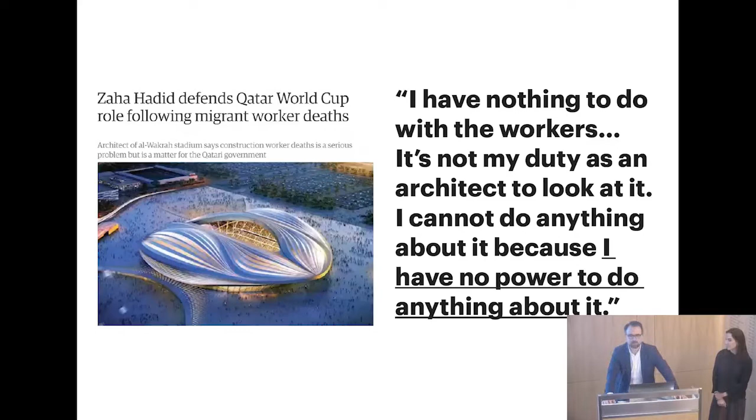This is in contrast to remarks that have come after, which have undergone a lot of fire, but not really pointing the finger at Zaha here—more at the idea that someone with her clout feels a lack of power in a situation. This speaks to the role of an architect or engineer, that they don't feel they can do anything about a construction site.

I think another one of our heroes is Giancarlo De Carlo. This is from 40 years ago, but looking again at contemporary architecture and my profession, we tended to think about what we were doing in a very narrow sense, and not broadly about its relationship to broader society. At this point, 40 years ago, it's pretty ironic that it's as salient now as it was then.

The risks of dependency and megalomania leading to social political indifference.

I gave a talk a couple months ago at the Museum of Architecture the day after this had come out. Again, I think it's interesting that one of the heroes, Sir Norman Foster and his firm, would lose a case about a project that ran well over budget. Ultimately the court decided it was their fault, but their defense was that it wasn't their responsibility—they were not in charge of cost and quantities, which I think would be a core responsibility of any design firm. That defense was ultimately lost, even though the client had taken away that power from them—they were still accountable for it.

Again, this is a guy with 'Sir' in front of his name that doesn't have the clout as a profession to have that within their scope of services.

And lastly, certainly not one of my heroes, would be the comment at the end of it, which suggests that our role as architects and engineers in the construction industry is such that social justice is not part of our competency—and we would certainly think that is the opposite of what we're supposed to be doing.

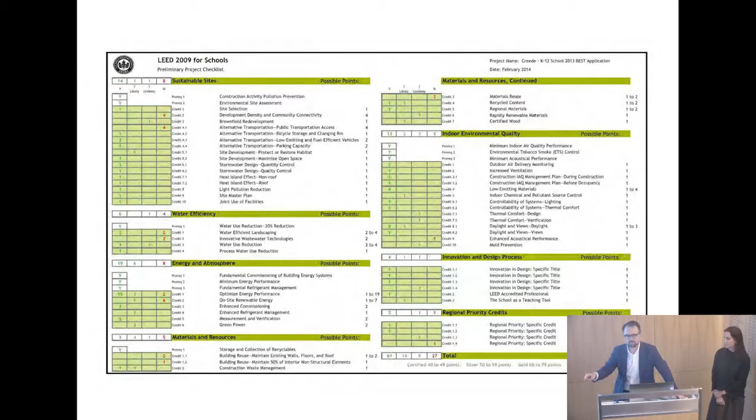We are green, right? What we at Mass were looking at was, okay, what are all the different ways—the kind of LEEDs of the world—what's out there right now for us to account for our work?

Because we are working with NGOs and health professionals in professions where funding is really based on data, they have to show results to get re-upped every year based on their annual contribution. So us as architects and engineers were like, well, we ought to be doing that too.

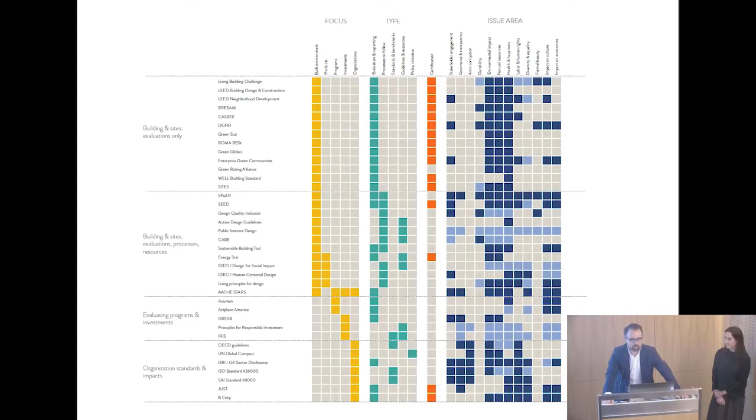What is out there? These are all the different kinds of LEED-type metrics that exist that we could find. And what we saw was that they're all very specialized. It's very much about environmental impact. You've got some things about health and happiness, and a few things about beauty, like formal beauty, but there are actually things out there about that.

There's zero on the mission side of a project, the bigger question of what you're doing and why you're doing it. And there's very little on the systemic side, i.e. how is this building or this project actually transforming the organization, the Institute of Structural Engineers, for instance? How did this building change the way that the organization operated?

So in thinking about this and the way that we have approached our projects, the first question we ask of our partners or ourselves is: what is the mission of this project? What are the broader ambitions of what we're doing here? And how at the end of the day do we measure them? How do we figure out that we're actually achieving what we set out to do?

And then as you drive directly across that, you're going to hit everything else. You're going to hit your environmental performance, or emotional satisfaction, which again is something not very measured. But these are things that are indirect, not the direct reasons why a group builds a building, right? A group is building a building for something larger, something more aspirational than just wanting a green building.

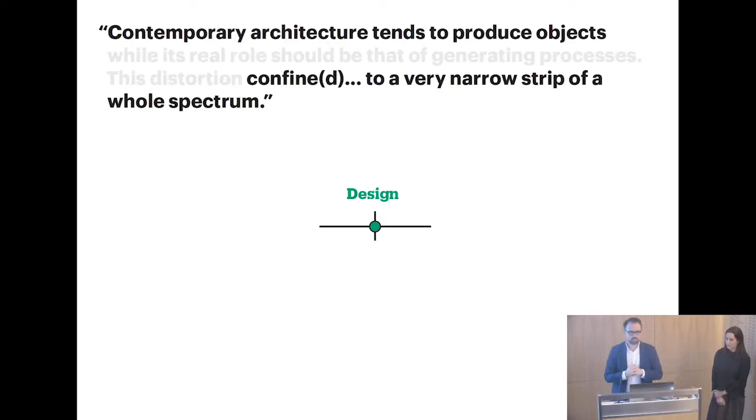So back to De Carlo's words, contemporary architecture tends to confine ourselves. We're designers, this is what we do, right? And we've left ourselves out of the whole process, from the front end of just getting in the room and working with an organization or an individual to help them envision what they want, even before planning and programming. And then ultimately we have some role in construction, but how much say we have in it is fairly limited at this point, and certainly very little is happening at the occupancy point.

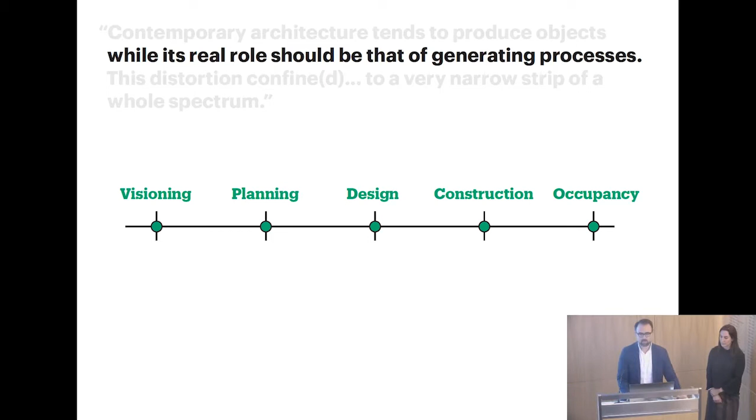So there's this wide spectrum of what we could be doing through the process of a project. And too often, I'd argue, certainly in my profession, we arrive late to the party. We're showing up at design when we've already missed the two fundamental parts that precede it. And it's going to set us back, and limit ultimately how effective we can be.

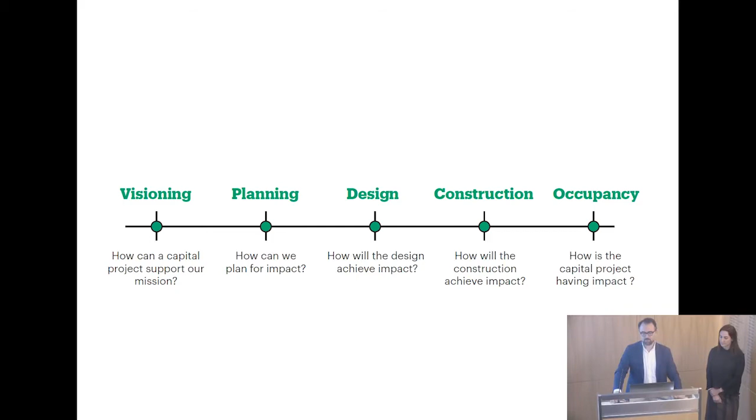So along these questions, what are the mission questions that we would ask the people we're working with? How can a capital project support your institution or your group? Is this what you actually need to do? Do you need a building, right? How can design achieve impact? How can construction achieve impact? We open these questions up to the people we're working with.

So that was kind of where we started as MASS. It doesn't stand for Massachusetts. It stands for a model of architecture serving society, if you're interested.

Our mission is very simple: that our direct mission is to research, build, and advocate for an architecture that promotes justice and dignity.

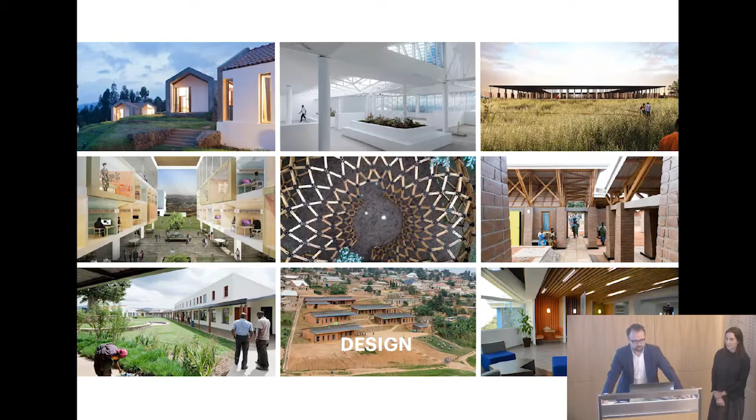We do a lot of design. This morning, I don't know if you've had a chance to see The Guardian, but pretty excited to say that the memorial in Montgomery, Alabama is opening today, and it's in The Guardian and on the front page of the New York Times today. We design things, but we also research a lot.

We want to think about that occupancy question, and also at the beginning, how can we work with organizations to think about those ends of the spectrum and help it feed back into what we're doing. So we do a lot of research, and as a nonprofit, a lot of the fundraising we do supports that work, which otherwise would not be funded within a typical design practice. And we also advocate a lot, and I think this is a pretty unique part about what we do.

Advocacy in this case was shooting a movie, which I'll show you shortly a trailer for, in Haiti about the cholera treatment center we did. Some of it could look very self-promotional, and certainly that helps when you're fundraising, but a lot of it is intended to work with the groups that we work with that ordinarily can't afford a building or can't afford design services, to bring the attention and the spotlight to them and their organizations and their fundraising.

In this case, you'll see GHESKIO, which is a Haitian organization that's been dealing with tuberculosis and HIV/AIDS. These are some of the groups we've been working with. Again, Equal Justice Initiative is the one today that we're celebrating in the United States. But certainly, the people we team up with are friends at ARUP, where we're currently hanging out these days, and a range of government and other NGOs that we've worked with on projects.

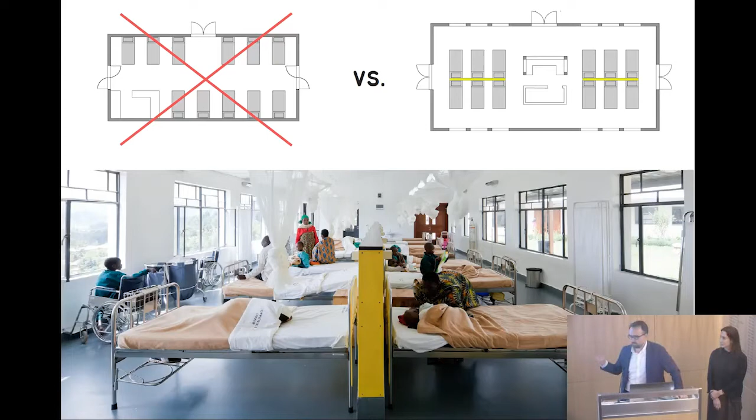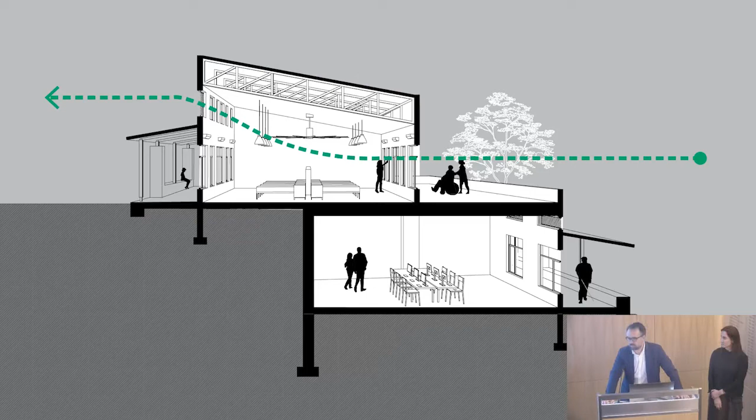And from an engineering and design perspective, all your gas and all your power is all in this wall. So you've halved all your MEP in the room and kind of put it in this narrow little wall instead of on both walls. So might be subtle, but a super important design decision that was arrived at through constraint and looking at everything, simple first principles across ventilation. Building does not have any air conditioning outside of the operating theater. So again, we have the advantage of the world's perfect climate, so you can just open your windows 24/7, 365 days a year to do this, but really starting to think through the basics of passive ventilation and first principles of design, I'd say.

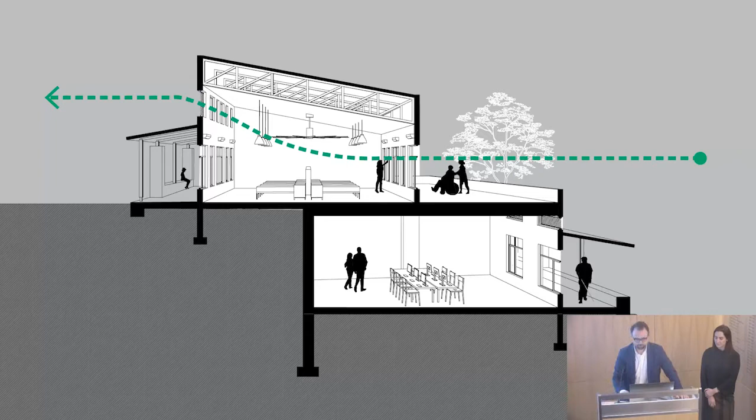This is what it looks like outside the wards. So instead, the wards are small, keeping our gross square meters down, but we have this landscape outside. So we, as much as possible, create outdoor space for people to get out into. The courtyard itself, its campus, is designed around this tree that the king used to hold court under. And that creates a beautiful landscape for people to walk out into. They're healing. This is a landscape that heals.

So a big part of what we were thinking about was that all the corridors are exterior. They're not interior, for disease control and infection control measures. Keep everything outside, get people out into the outdoors. And this is a kind of overview of it.

If you've not been to Rwanda, I always feel like I'm doing plugs for it, but this is your typical view, basically. The whole country looks this gorgeous, so come down.

On the back of this project, seemingly a success, their Partners in Health is great, fantastic. Alright, well, we need doctors here, right? So there were zero doctors there before. So our second project, on the back end of that, was to build housing for doctors at the hospital. It's about 2.5 hours outside Kigali, and the only way they're going to attract and retain talent to work there was if they live there, and they wanted somewhere that a doctor coming across from London or Boston or wherever else would feel comfortable—I'm going to live here for 6 months and train the doctor next to me. So we did doctors housing on the site, and again, very much in keeping with what could we build on site, and I'll get into that in a second.

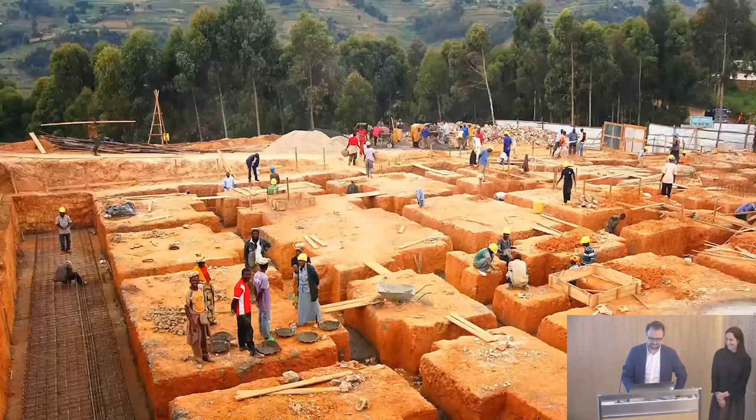And this is the first principle, and that happened over and over and over again. You got a set amount of money. You are in control of the biggest investment in infrastructure this community has ever seen. You've got the potential to make sure that as much of it is left in that place, and that people are gaining skills and jobs.

So that led to a series of decisions. What do we make this building out of? This is in the volcanic region of Rwanda, kind of like I've seen in Western Ireland, where stone is always coming up out of the soil, and they're piling it on the side—it's a waste, get out of my farm. So you see this everywhere, and some people make walls out of it. Sorry, this is the contrast: this is the wall you would see driving around, and cement is the expensive material. So they're celebrating, hey, look at my wealth, I can afford cement, right?

And we're on the other hand, well, if that's the expensive material, labor's the cheap component. It's the inverse of, I'd say, the construction industry certainly here. Labor is the cheap component, material is the expense. So maximize labor as much as possible, and you have this obscene ability to do mass customization. So that was a decision early on and became the icon of this project. Through this, the tenets that we learned and now use in all our projects: first thing is hire locally, second thing is source regionally. Some of this is just best practice or common sense perhaps, but in a lot of cases, you just don't have a choice.

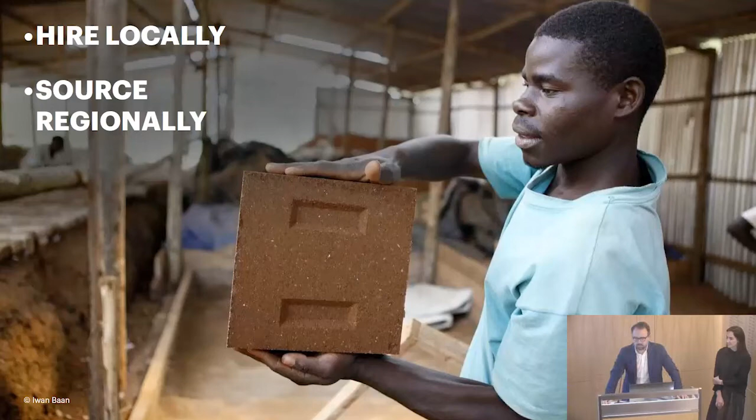You have to figure out how to get it locally. And we'll show you later on what we're currently doing.

Train wherever you can. We're working in areas where we're trying to create more employment and get people skills that they can take on to their next project in a part of the world that construction is obviously happening in. That's Teo, one of our fellows at that point, teaching. You can see a room full of children.

And uphold dignity. So much of it is about our human relationship to the projects and the communities that we're in. How do we make sure that is always at the center of the decision making of what we're doing? This is one of our schools that we built. So clearly, we've been doing all right with this.

We get some recognition, and it was an interesting point in time. We're getting on the front page of the Times here, and it's kind of a segue over to...

We were getting more and more work, and I think we were thinking to ourselves, okay, well, we can continue to work with engineers in California in a 10-hour time zone gap, and they're donating their services to us, or we can bring in our own engineering team and help build that part of our office to really support what we're doing.

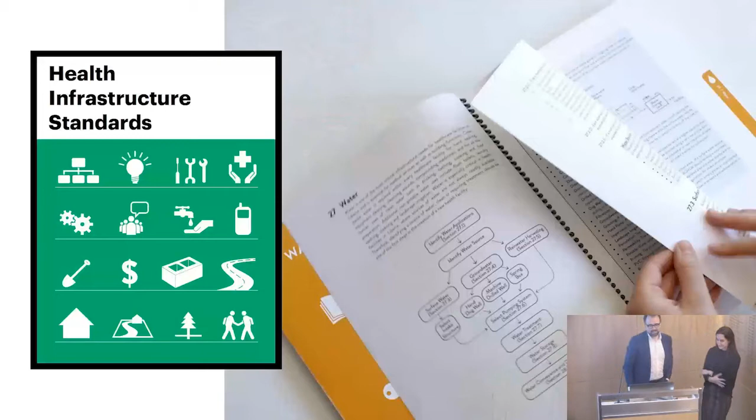And it was this project that Tim, ultimately the seed of MASS engineering, came on to help and started that. So I'll hand it to Rosie. Thanks.

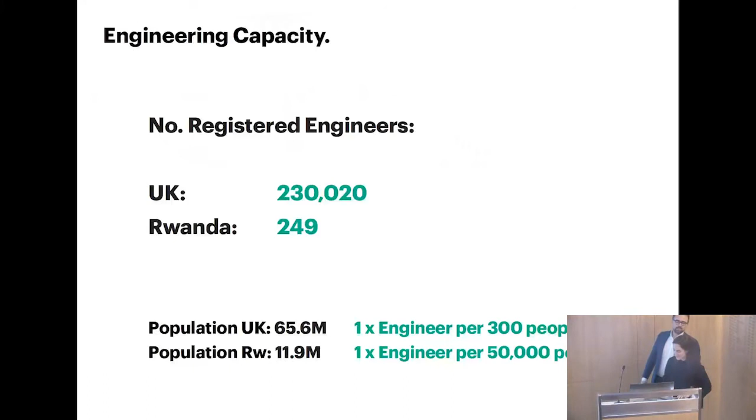As Faith said, I've been in Rwanda for 2 years now, and I lead the engineering team. It started out as a 12-month Engineers Without Borders placement, and this is why Engineers Without Borders work in this part of the world. We've got a huge capacity issue when it comes to engineers.

I did a little comparison earlier about the number of registered engineers in the UK versus Rwanda, and it's such a huge difference. We've got 1 in 300 here versus 1 in 50,000 there, and we have the same infrastructure needs. There's also the fact that institutions like the IStructE and the ICE have been around since 1818, and in Rwanda the Institute of Engineers only set up in 2008, so there hasn't been a regulating body there around for long either.

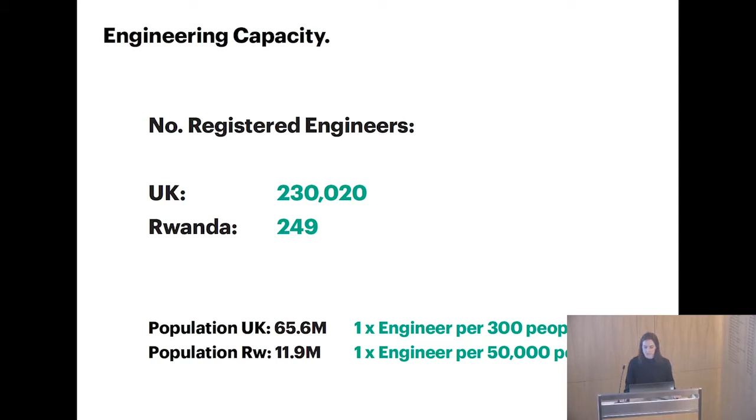So as Kelly mentioned, the engineering team started a few years ago with Tim and Christian. Tim was on sabbatical from Arup for a year. And when he left, he put MAS in touch with Engineers Without Borders, which led to Louise joining in 2015, and a very small team expansion with Obed there.

And then I joined in 2016, and we were able to hire Shakira. And now 2 years later, the team has tripled in size. Through our relationship with Engineers Without Borders, we've been able to expand to a multidisciplinary team and hire much more local staff. So we now have geotechnical engineers, civil engineers, mechanical engineers, electrical engineers, and we've also got 2 Arup secondees that are over for 6 months for a particular project, giving expert advice.

We also have our own partners, obviously Engineers Without Borders and Arup, but we also partner with other engineering firms. We do this because our team's not big enough to provide our own design review internally, so it's good practice for us to make sure that we get that technical review from another firm, and also to get particular advice on seismic design or certain innovative materials that we'd like to use.

So when I first joined MAS, my first project was a site supervision project, and that really gave me some clarity into construction in Rwanda. And so there's certain challenges that we face.

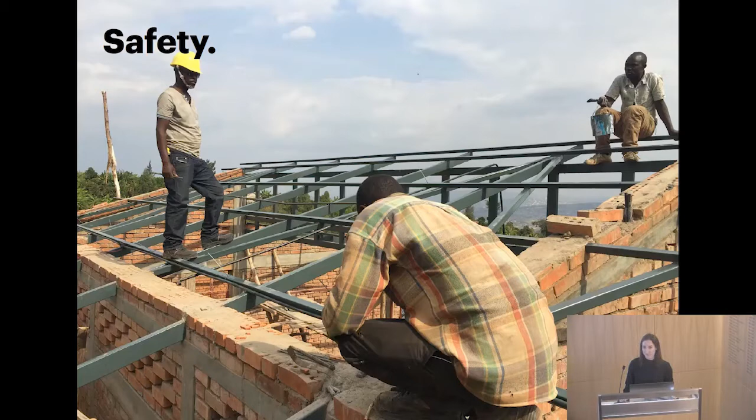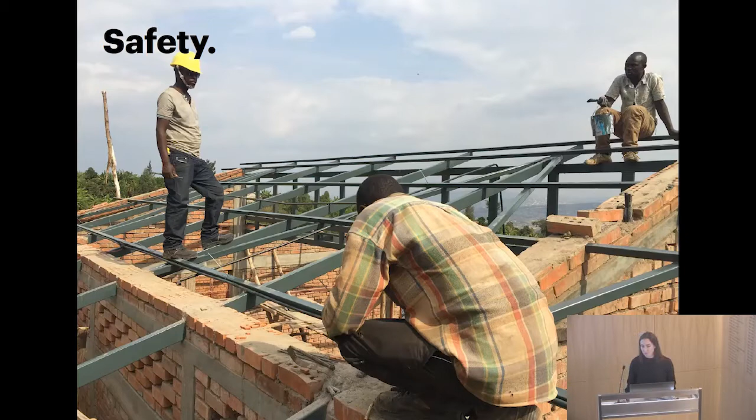As you'd expect, safety is one of them. There's a lack of data, lack of published data into accidents in the construction industry. I'm assured by doctors that they happen frequently, but I think because they're not well advertised, people don't necessarily understand the danger that they're in. And a lot of the labour is unskilled, and they don't have any basis to demand better working conditions. So we make sure that on our sites now, we have a member of our team, our health and safety officer, who does monthly visits to make sure that both our staff and the contractor staff are safe, and that we're getting the client to buy into our initiatives.

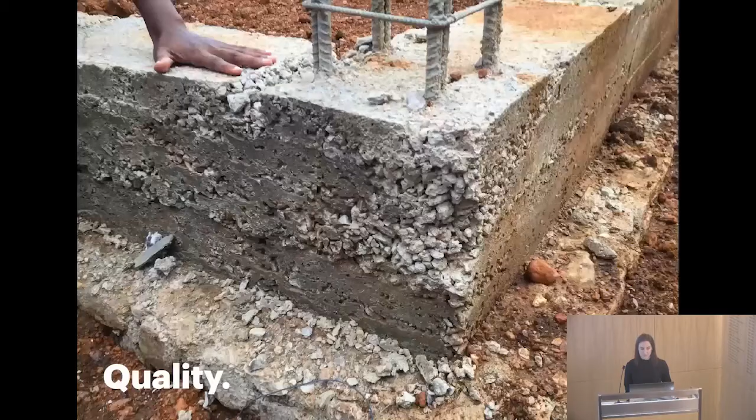Quality. Now, often, as I said, the labour's unskilled, and there's a lack of decent equipment. But we do absolutely believe that high quality construction is possible with the right amount of training and supervision. And it's often just about setting up the right relationships with the contractor early on so they know what you expect.

So we have to be extra vigilant on site and really understand everything that's going on, because this was a big concern for a few weeks until a retaining wall was built.

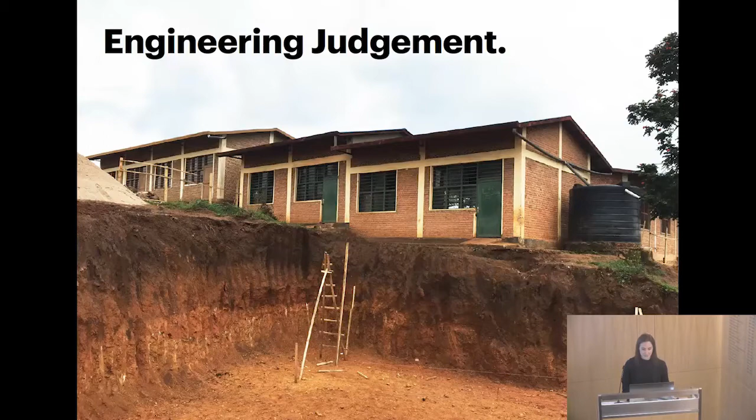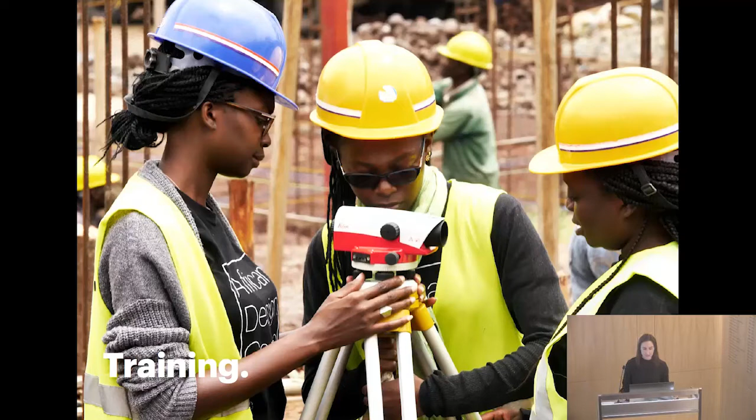So I think what we've come to understand is that construction requires supervision 100% of the time. And now we're entering a period of unprecedented construction at the company. We've got more construction happening this year than we have for the last 10 years. So we've got a lot of responsibility in terms of site supervision, and we've set up a training program to make sure all of our engineers have the right support and training to do that appropriately.

In terms of challenges in design in the country, it's a very hilly country, as you saw from Kelly's photos. So we've got lots of retaining walls, and lots of them fail. There's also a decent amount of building collapses, particularly recently - there's been a lot of storms, and we heard of about 5 building collapses just yesterday. So promoting structural integrity and good design is really important.

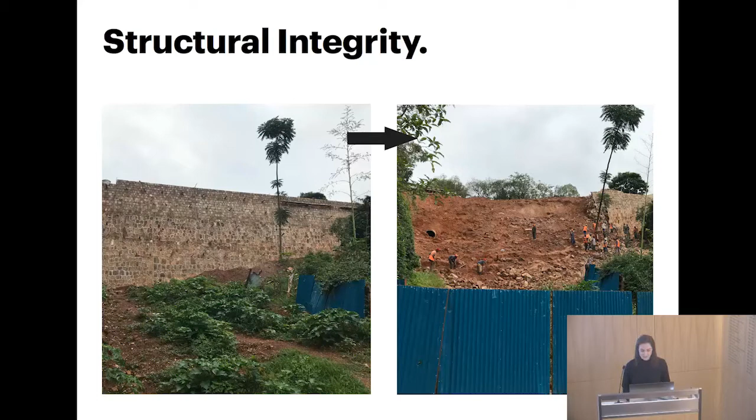And it's a seismic zone which isn't well understood. As our engineering team has been small and we haven't necessarily been around for the whole of MAS's history, we have used other local consultants, and at times our engineering team has had to get involved to explain why we don't think their design is appropriate. That's another reason why we've been expanding so much, to make sure we can cover a lot more of MAS's work and be confident that it's structurally sound.

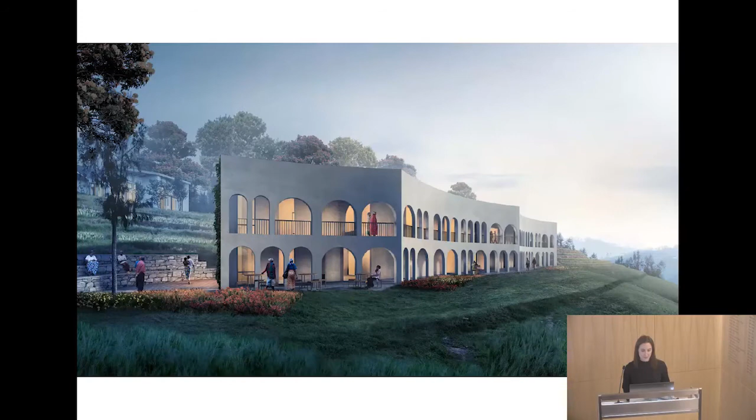So back to the story of Butaro. After building the cancer patient ward, we realized that so many people were coming from all over Africa to visit it - the next closest one is Nairobi. As it's way up in the north, there's not exactly a wealth of hotels around, so we needed to design some patient housing. Partners in Health were concerned that a lot of the people coming for treatment were sleeping rough in the grounds of the hospital.

So we designed a 2-story patient housing. It's a reinforced masonry structure with a concrete frame and a masonry arch system on the front, and it has equally beautiful views. We really thought about how we would present the drawings, because obviously it is a complex design, but we believe it's absolutely possible to build. We just need to make sure we give the contractor the right tools and details. So this was all thought through very carefully.

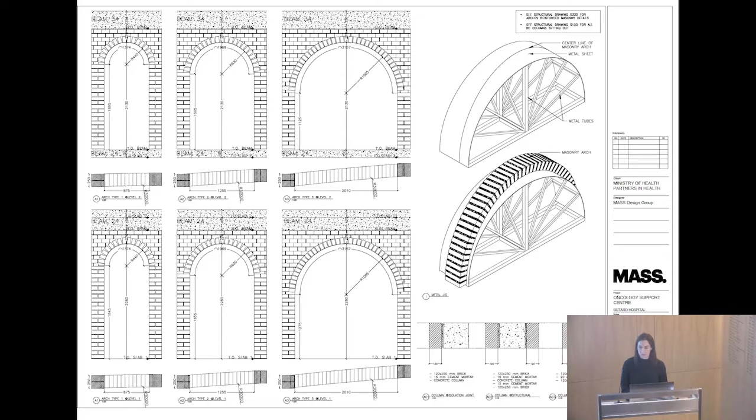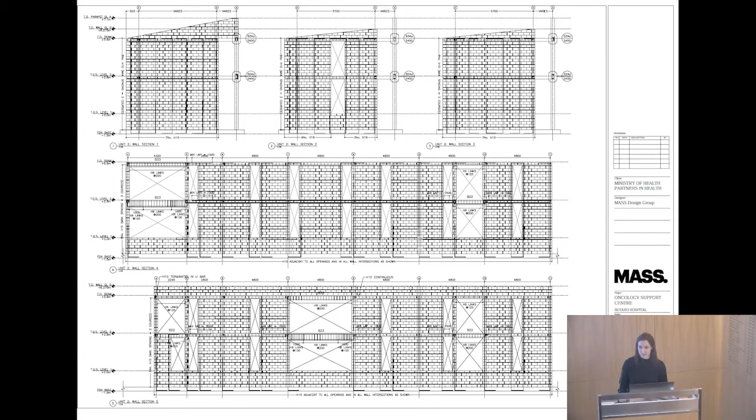In terms of reinforced masonry, this isn't a common construction method in Rwanda, so again we had to be really careful with how we detailed it and how we explained it to the contractor to make sure they understood the system.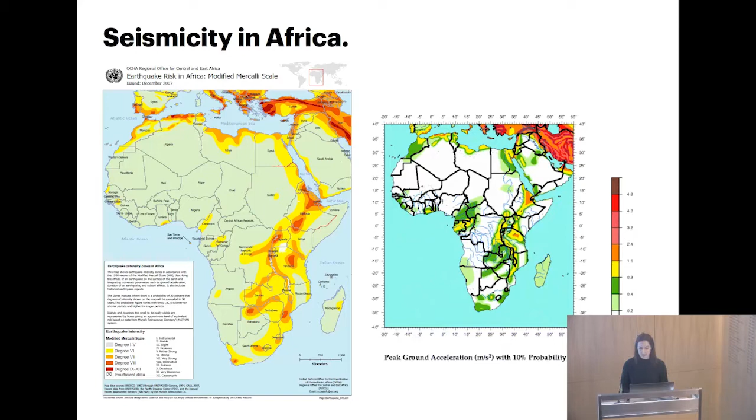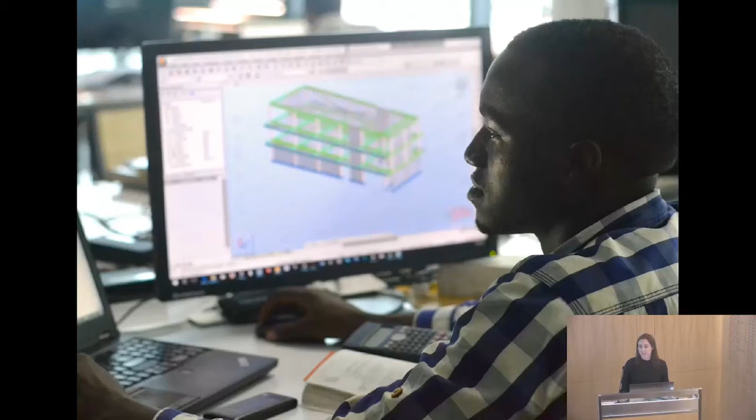This is Obed doing a modal response spectrum analysis, which he showed when he went for his chartership interview. The interviewer was so impressed he asked Obed to send him the research papers he referred to, and was blown away that he really did real seismic design - which was great for Obed, because he passed with flying colours. But it doesn't give much confidence that the regulating body also doesn't have that much experience in this area.

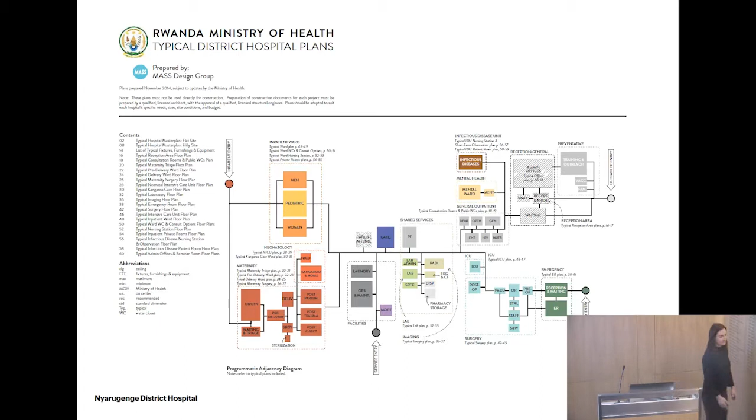I'll pass back over to Kelly now. Yeah, thank you. So I think on the back end of all this work at Butaro, we were asked by the Ministry of Health of Rwanda: we need 29 more of these. Can you give us a template, please?

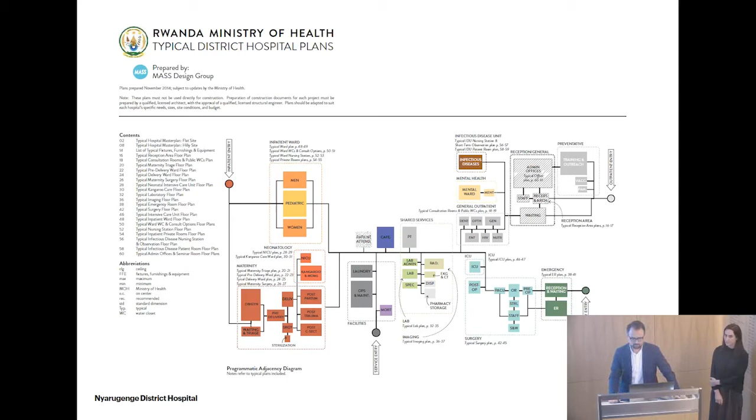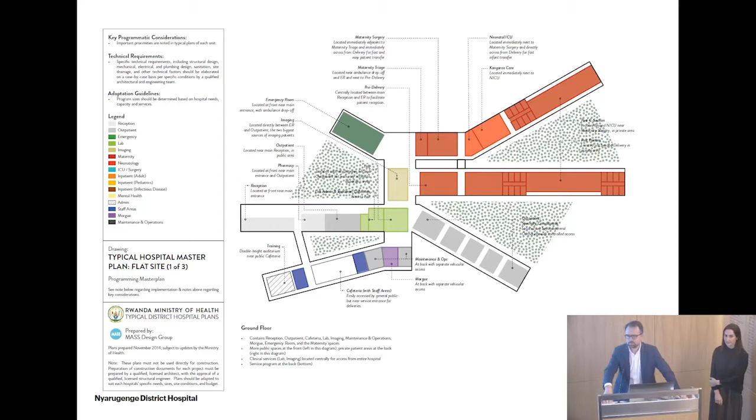That ended up in this body of work, which was essentially typical plans for what their hospitals were. Instead of just saying, here's a set of blueprints you can copy and paste across the country, we said it's more important that you understand the basic DNA of a hospital and modify it to each site, because there'll be existing buildings or hospitals there. You have to think about how you plan around them and incorporate the expansion with what's there, and basic planning principles. The target of this document is really the in-house engineers and procurement officials of the Ministry of Health, so they could correctly evaluate other designs. We certainly didn't want to design all of them.

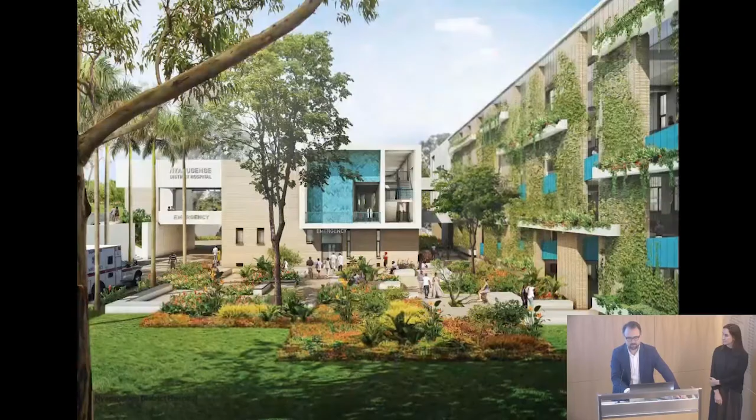They said, okay, can you test drive this, please? Show us what this looks like. So we built—this is in construction now—we designed two hospitals, one in the rural south, a similar site to the Butaro hospital. This is in construction right now. And one downtown Kigali. These are kind of racing each other to the finish line, both in the application of these standards to radically different sites and contexts. In both cases, looking at materials like brick—there's a brick factory on the corner in Kigali—versus the stone that's on the other project in that area.

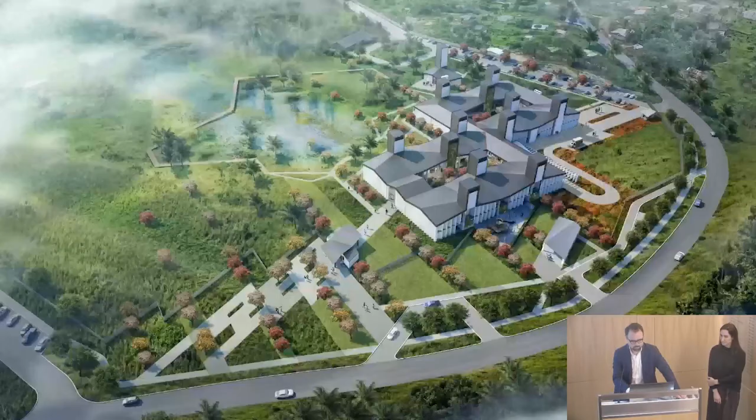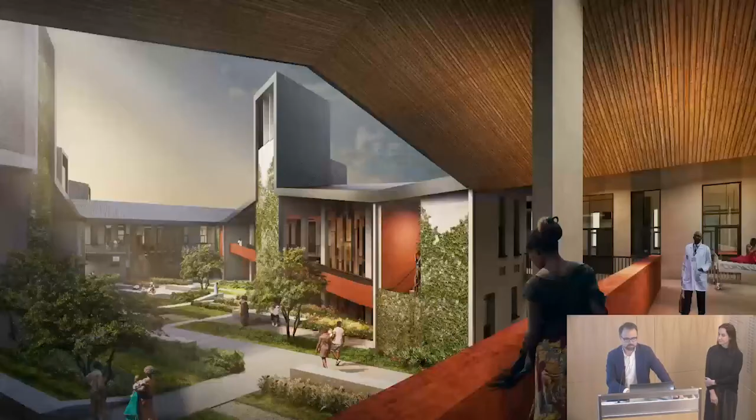I forgot this—we then airlifted this over to Liberia. So we're currently doing a new national hospital in Monrovia with the World Bank and the Ministry of Health there. Again, that basic standard, but a slightly different form and a radically different climate—a lot more humid—looking at stack ventilation to get the place cooled. The interior, again, shows how the space can be quite open, airy, outdoors, really cutting down on the HVAC again.

As a transition from this body of work we'd been doing in Rwanda, a few years ago we were invited to Haiti—not after the earthquake. I think there was a big surge of activity and investment into Haiti immediately after the earthquake, and 'building back better' was one of them, you might recall. We came in well after this, invited by GHESKIO, not because of the earthquake, but because of what happened after it: the massive outbreak of cholera.

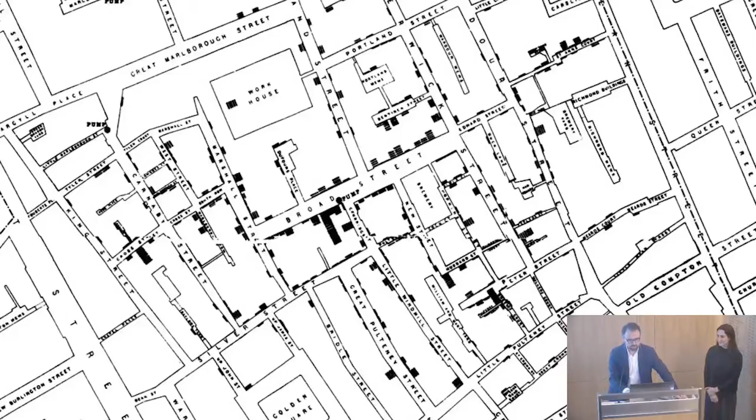To contextualize this relationship to cholera, our good friend John Snow, not too far from here, traced the origins of cholera in London to a well in a specific neighborhood. My wife happens to be in public health, and this is kind of the beginning of her profession—an interesting thing about the spatial planning relationships of disease and health to planning and architecture and engineering. The Broad Street pump, famously—you go there and there's barely a plaque on the wall, just a brick in the sidewalk saying this is where that pump was. Such a significant part of the history of the city.

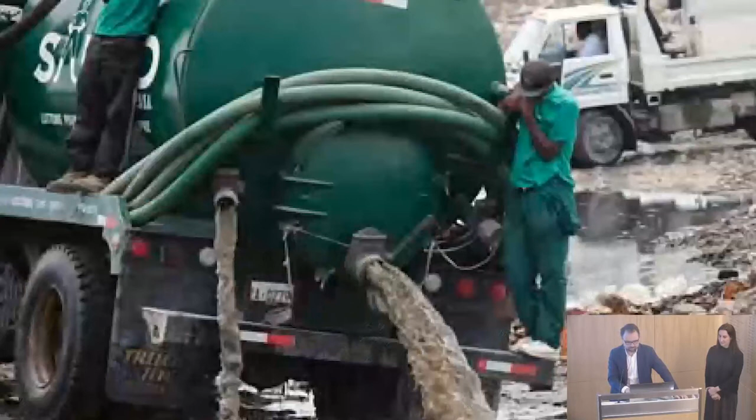This was the Broad Street pump of Haiti—these guys are fairly well known at this point. The UN had come, famously, I think it was Nepalese UN workers who brought cholera to Haiti. It had not existed on the island for over a couple of centuries. That set up in the camps initially built to house them, which ended up housing cholera. The contractors were then bringing the waste, the fluids, out of these cholera treatment centers and dumping them.

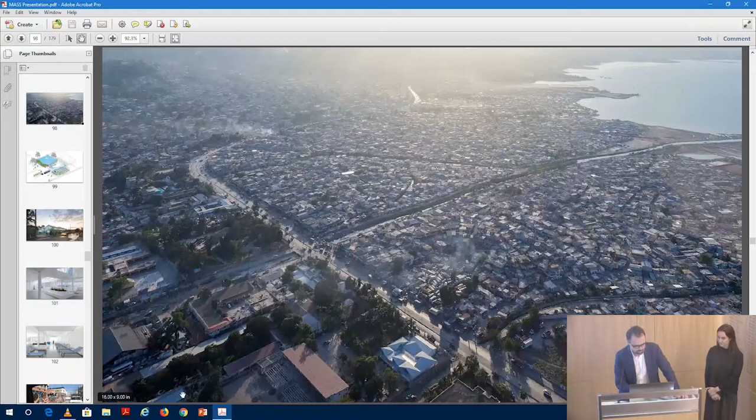So to help bring attention to this, as I mentioned earlier with the advocacy, we wanted to shine the light on this project to get more funding to deal with this issue. So we made a movie.

I went into infectious diseases because I knew that they were the diseases that kill my people. I thought that this was a profession where you could actually do something.

Breaking news out of Haiti: a massive catastrophic earthquake has struck the country. Tens of thousands of people, 200,000 dead. All that we have done within a few seconds were destroyed.

Nine months after the earthquake, a new disaster in Haiti: an epidemic of cholera. 20,000 cases, up to 200,000 people.

Yes, there was a big earthquake, and then this cholera hit, but they were completely unrelated.

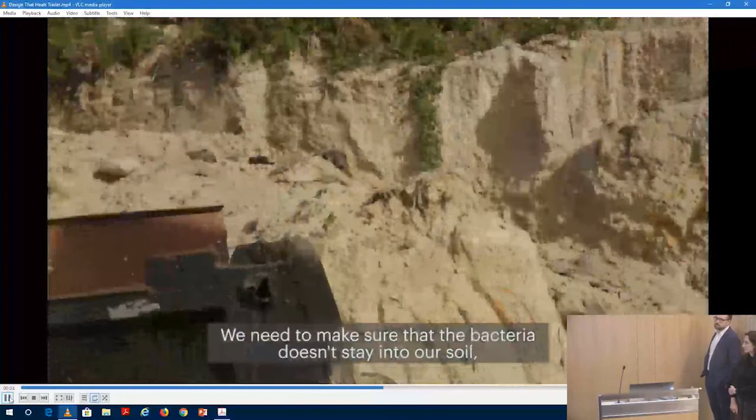In Haiti, we need to hit cholera very hard. We need to make sure that the bacteria doesn't stay into our soil, into our water. Clearly, the infrastructure is key.

There was always a sense that we could do better, to create a structure that would be adapted to the needs of the people and that would have some kind of dignity that is fully Haitian. Development does not rely only on health; economic opportunities and education are also essential.

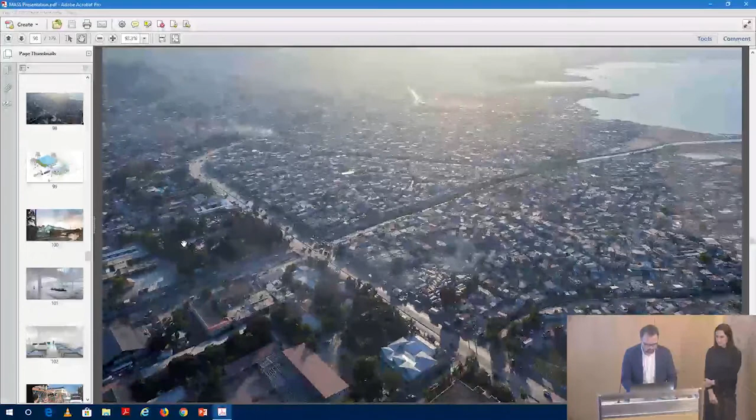So as you can see, in the design of this building, the key thing was how you contain the cycle of infection, through water and waterborne disease. We made the roof collect all the rainwater possible to be the basic life of this building. Everything that came out of it, all the waste, is filtered on site in this filter bed, so none of it is contracted out. Nothing's going outside of the yard of this project.

This is what it looks like from the street. And the inside, you can see here - it's counterintuitive to have in a tropical place your roof have water come into the building, but that's what we decided to do. It comes down through these trellises into this underground filter bed.

We designed the chairs. If you've seen what typical cholera looks like, it's certainly not pretty - you're lying on a bed and there's a lot of fluid coming out of your body very quickly. It's from a perspective of comfort and dignity and safety for the people that worked there. We worked hard with Herman Miller to design a chair that you could take the cover off easily and wash and reuse, because the furniture was what was doing a lot of the transmission between patients.

So we were thinking about how can we ground this building to the place. This is the kind of buses and things you'd see in Port-au-Prince and the artisanship that happens there - a lot of it is rolling out old oil drums and beating this kind of ornate metalwork. We found Mackenzie, one of these individuals that do this, to work with him to design the whole facade. Instead of doing a CNC robotic facade for privacy, cooling and screening, the whole thing was done by hand with him and his friends.

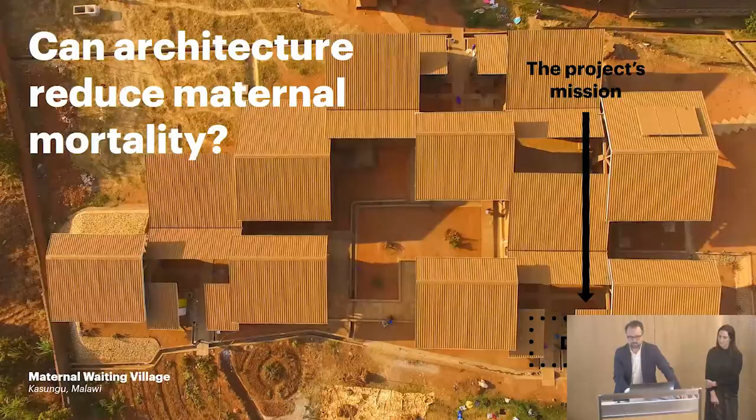And what we were asked to do was come along in this context and kind of rethink the model that the Ministry of Health had.

So we thought, if this is the model they've got, how can we improve this without making it more expensive? The one thing this does not look at is that more often than not, these expectant mothers are also coming with at least one, if not more, caregivers. So though there's a bed for her, there's not a bed for her friend, her mother, and the people coming along with them.

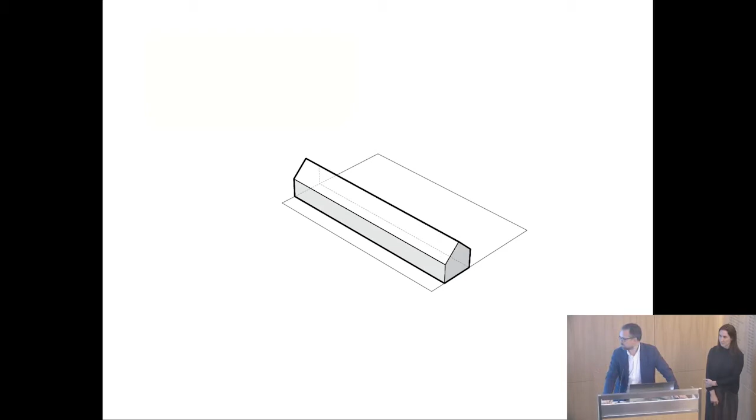And this is a problem, again, like the cancer treatment center. It's not like there's a hotel they can afford outside the hospital doors. So they end up just camping on the lawn.

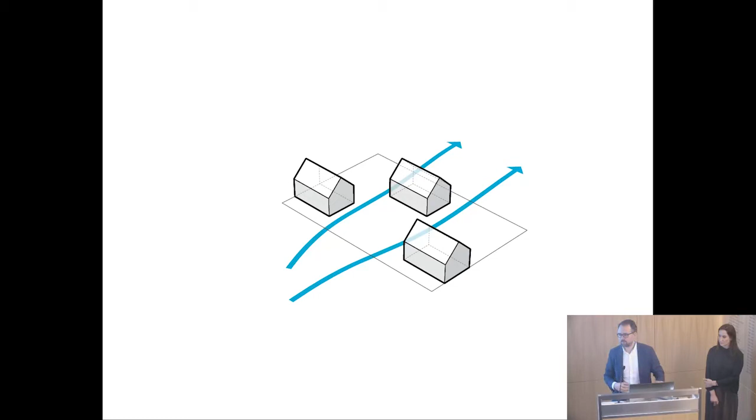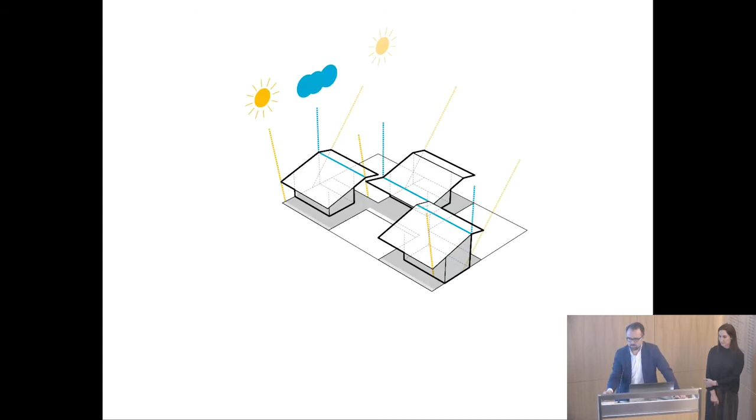We took this, we cut it apart. They're coming from villages, so how could we make this a bit more broken down in scale, village-like? It's super hot and sunny in that part of Malawi, so how do we extend the roof lines to create more shade? It's also very arid, so how can we do the right things as far as rainwater capture and reuse? And they need to cook for themselves, so let's get a kitchen there. There wasn't a kitchen before.

And what does this look like? These aggregate into this kind of small little kasbah of housing here. As you can see, it's 5 per room, and this is one cluster of mothers here. So they have a group of 5, a group of 15, and a larger group of, I think, 40 expectant mothers at a time.

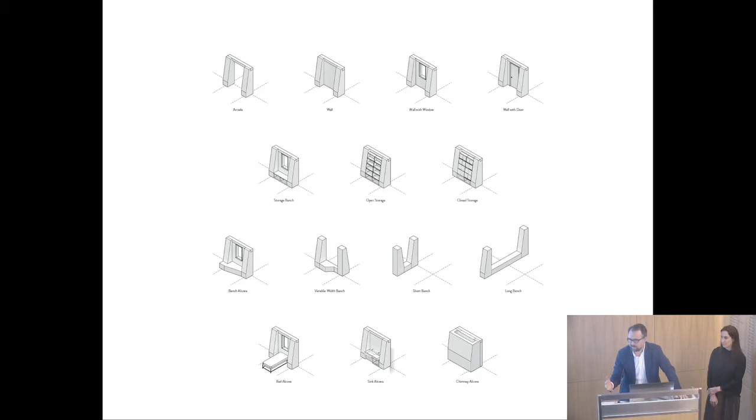We pushed from a design and structural engineering perspective — actually, Tim did a lot of this — we looked at using CEBs or CSEBs in the project and had to limit cement and steel as much as possible because of construction cost confines. So we really pushed this column to do a lot more than just being a column, it becoming the furniture and a place for ultimately the mother and the friend to sleep outside underneath the roof. So kind of like sneaking in housing for the others into the same envelope.

This is what that looks like. As you can see, during the day too — I mean, I've been a father for a month now, so I can certainly appreciate that when you're 8 months pregnant you're also never comfortable, you're always moving around. And when I went to see this project, you'd see mothers in the strangest positions, sitting on the stairs, on the laundry, on these little ledges, constantly moving around. You get a sense of the kind of dynamic community that's created around the structure, and the simple idea of extending the eave really works.

I mean, that's the kind of getting comfortable and spending the day in the village.

I think the other part that struck me upon visiting this project was this interesting part that the architecture — and this is a bit of an afterthought — is the community health workers who work there. They have the unique opportunity to teach family planning here because the women are far away from their husbands. So every day they have this kind of singing, dancing, and education event that happens in the interior of this compound. And this is within a broader community, so it really feels like a village within a village. It's open yet secure, and these women feel very comfortable there, which otherwise they certainly had not been. And that's a kind of look at that project.

What we're getting back to is this idea of accounting. So we're working with our partners — how do we prove that the decision they made was the right one? Hiring MASS versus just rolling out your standard template — like, we're probably a little more expensive than just copy-pasting this other thing. So how do we really justify that what we're doing is adding value? How is it actually performing better?

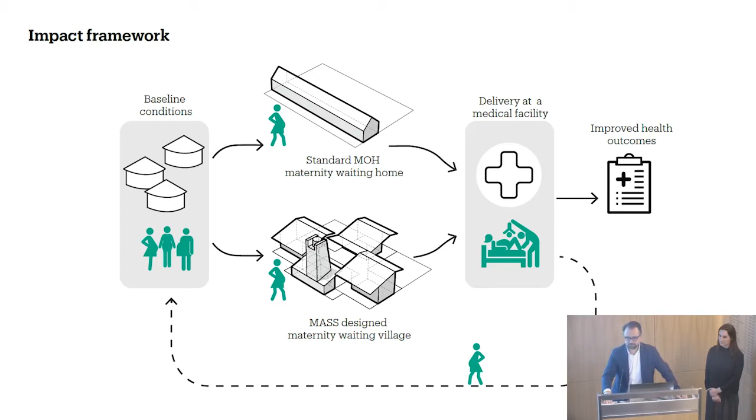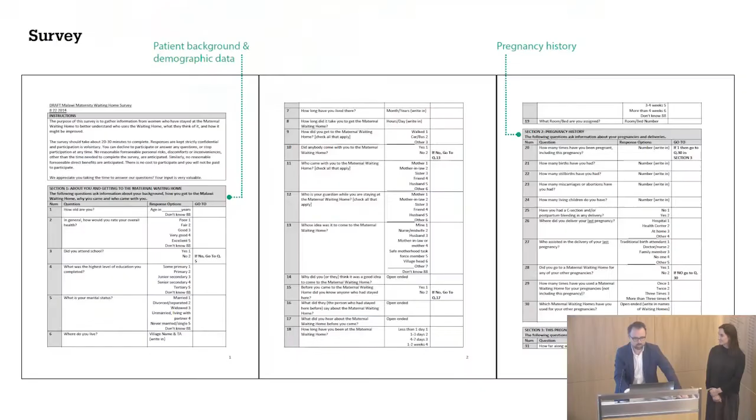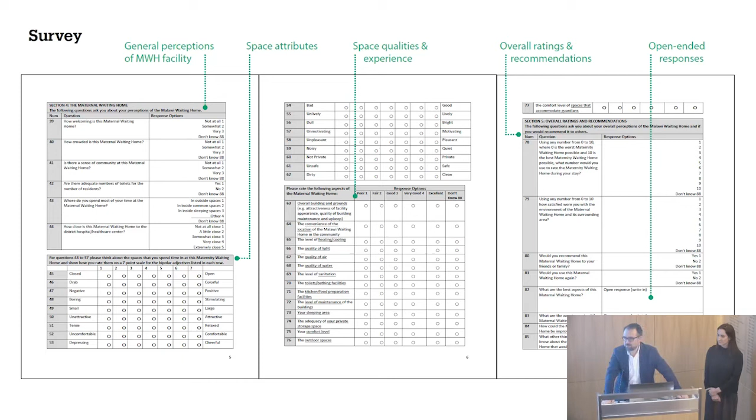Again, you go and you ask a lot of questions, and we did a comprehensive survey through all the community health workers in both facilities to measure satisfaction with the facility. These are the people that did the surveys for us, the women that worked there. We put this together, working with a number of people to figure out what are the right questions to ask: your background, your demographic, your pregnancy history, your perceptions of the facility, your spatial attributes. You can imagine for most women this was probably the first time they entered and were evaluating the architecture they were in, and it yielded some pretty interesting results and responses.

We rolled it all together and put it into a big spreadsheet to figure out, is it actually better? Results are a bit nebulous because it's not totally quantitative, it's very much also qualitative, so we need to go and talk to them too. We sent out our interview film team to gather interviews of all the women, the workers that worked at these two places, to compare them to each other again. We're beginning to do this, and I think it's going to take a long time to really get a sense of the experience and what's going on there relative to the other.

This means we need an awful lot of infrastructure in order to deal with this number of people, and we've calculated that equals 700 million housing units, 310,000 schools, and 85,000 health centres. And we need people to design and build these facilities.

So that leads to MASS's initiative to start the African Design Centre. Training has always been pretty core to what MASS do, and so in September 2016 we started a program for 11 ADC fellows for a 20-month program which takes them through the design and construction of a school as the core focus of the fellowship, but also a lot of other initiatives in terms of design, construction, professional practice, different softwares, history, why social architecture is important, to try and breed a group of responsible architects and engineers who can then go out and lead this big infrastructure boom.

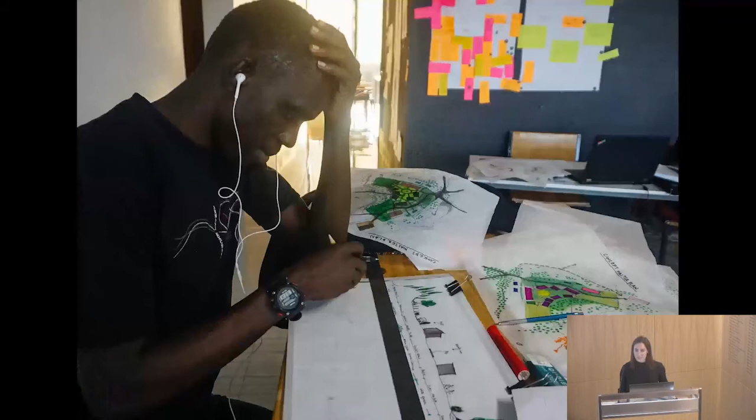This is Moses really trying to figure out the landscape here. In terms of the structural system, what you see most places in Rwanda is this typical concrete frame with masonry infill design, and it's not really been well adopted. Unfortunately, there's a lack of steel available in the country, and also a lack of appropriately dried and treated timber. So there's not many other options, but we encouraged the students to look at the options that there were.

So a concrete frame that's actually seismically qualified, what can we do with the steel that we have access to, and then different masonry systems which might be a bit more seismically robust.

We evaluated these against various criteria - cost, structural integrity, carbon. For this scale of building, concrete moment frame actually gave us smaller concrete sections than the confined masonry system. We couldn't get the steel frame to work for the section sizes we have.

Because it was in an area with a lot of volcanic stone, to avoid the use of fired brick, we would use the volcanic stone as infill. Therefore the moment frame was the most suitable option from a carbon perspective.

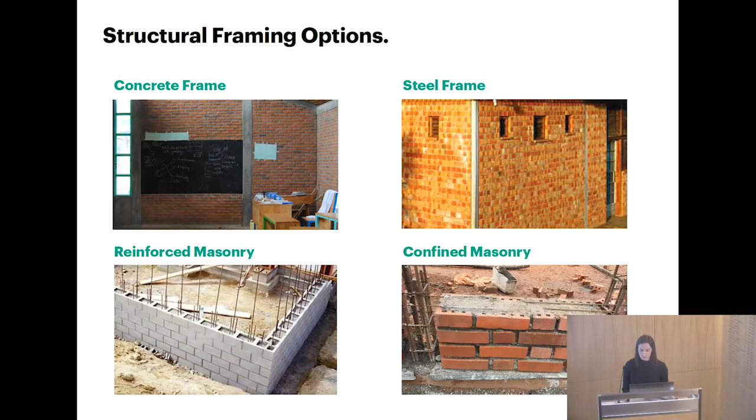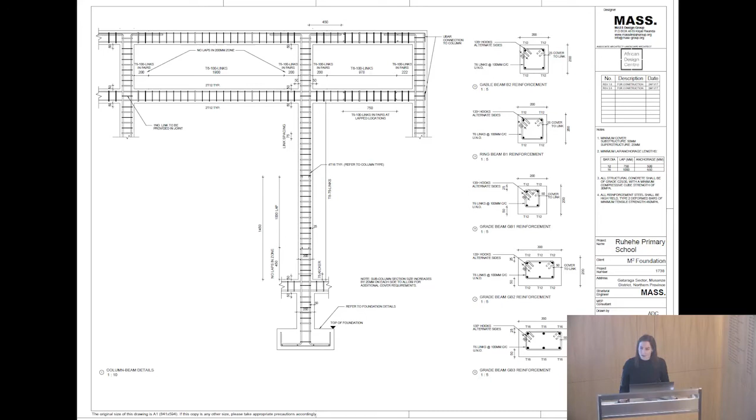But obviously it couldn't be done in the same way that they're currently being built. Moment frames require quite special detailing to make sure they're seismically qualified, so we had to really think about how we presented our drawings to make sure they were understandable to the contractor and really highlight the differences. So that's a render of the finished design.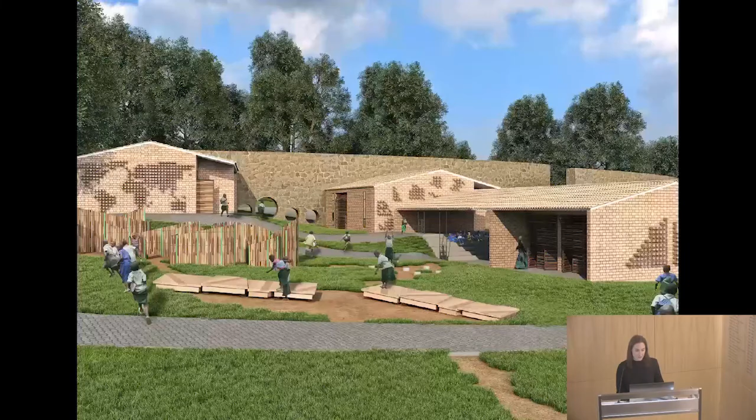There's another render here showing the thought that's gone into the landscape to make it educational. And now it's in construction, so I get to go to this lovely site every week.

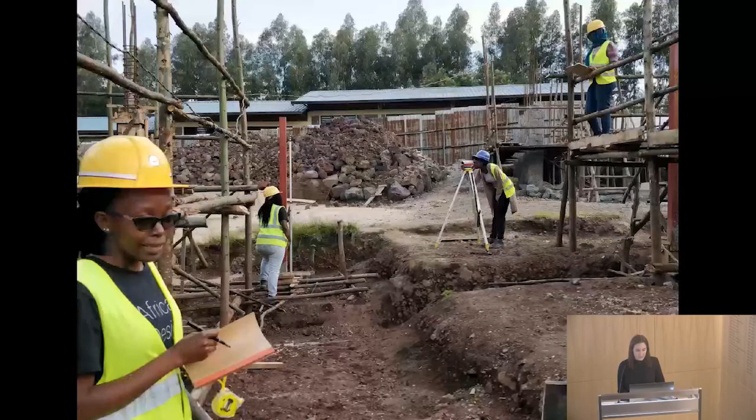We've got 4 wonderful women leading the site at the moment, from Malawi, Cote d'Ivoire, Uganda and Kenya. These women fully manage the site and employ all of the labor, do all of the checks and control everything, and they're doing a wonderful job.

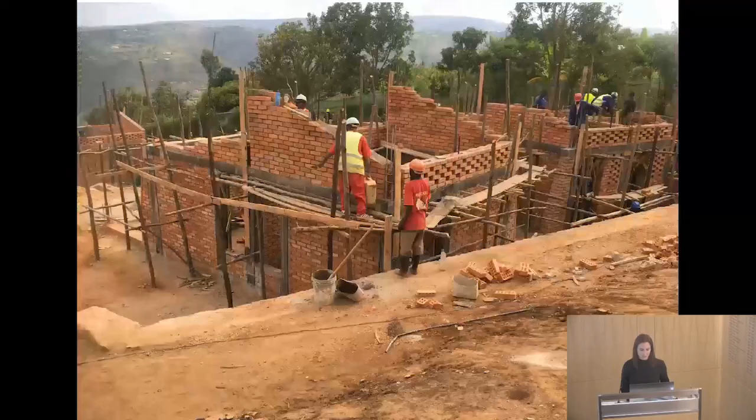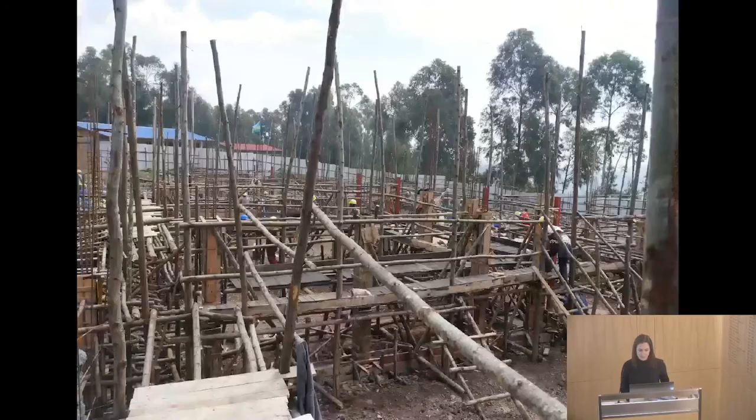We wanted to avoid construction like this, which is a photo from the previous project, where we have terrible scaffolding and unsafe conditions. Now that we have full control of the site, we have a sea of scaffolding with toe boards and handrails, and it's all very exciting.

We're also doing toolbox talks in a bit more of a low-tech fashion to try and explain to the low-skilled labour why it's important to wear the hard hats we've given them, and why certain people need to wear safety glasses, and try to give a bit of information about the risks. Also making sure we provide clean drinking water on site and look after the workers.

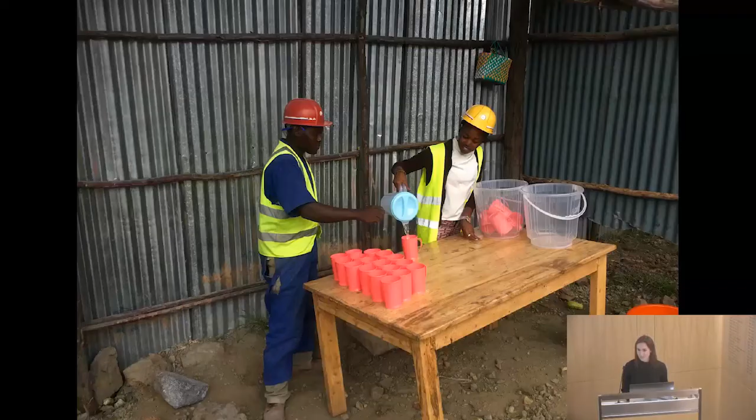It's hard for us to get quality materials - we actually have to hand crush on site all of the aggregate that goes into the concrete, so we're providing additional employment for these lovely ladies. There's one aggregate crushing machine at the quarry, but if you saw it and the conditions of dust that surrounded it, you'd understand why we prefer to go down this route.

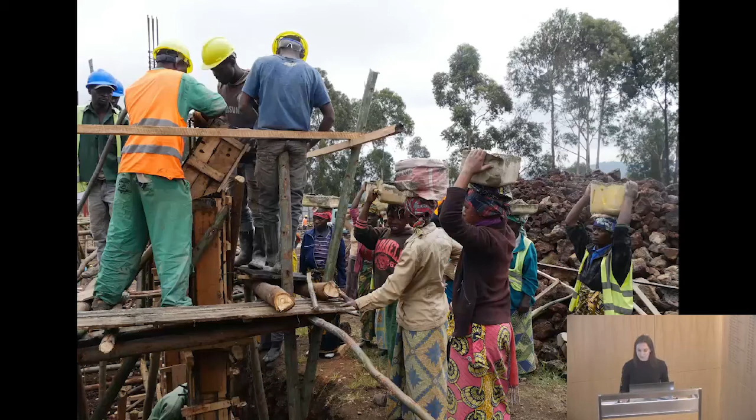We also suffer from a lack of equipment, so here we're pouring concrete via cut-off jerry cans, but we can achieve very high quality with wonderful safe access there. You can see the volcanic stones again in use, cut and shaped and immaculately placed.

So I'll just let Kelly introduce this one. Yeah, try to round it up - I know we're getting close on time.

The project we're currently working on with Arup extensively, and a few other people, is a new ground-up school of agriculture. This is a pretty exciting project where we got full control from the ground up - a campus for 250 students that's going to address the issue that 80% of Rwandans farm, and a quarter of those are food insecure because of issues of climate change, farming technology, and the state of agriculture broadly. This is only going to be exacerbated.

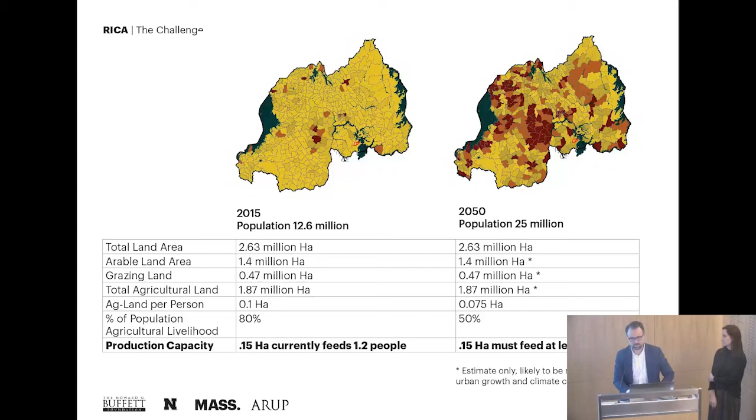We keep showing this 2050 slide as the good news and the bad news rolled into one, but how do we double food production on less land? That's the kind of question at the heart of this project. It's situated in the south of the country.

We've shown you the lush, verdant north of Rwanda more than once, and it's quite different as you cross the country. It rapidly changes into more of a savanna, which is more indicative of the whole bioregion between Burundi and up into Uganda.

So we figured if we can answer it there, it's going to really crack open questions of the broader continent. The mission of this project is to train the next generation of leaders in this version of agriculture, not a kind of industrial ag, but a conservation ag, trying to really rethink agriculture from a one health perspective.

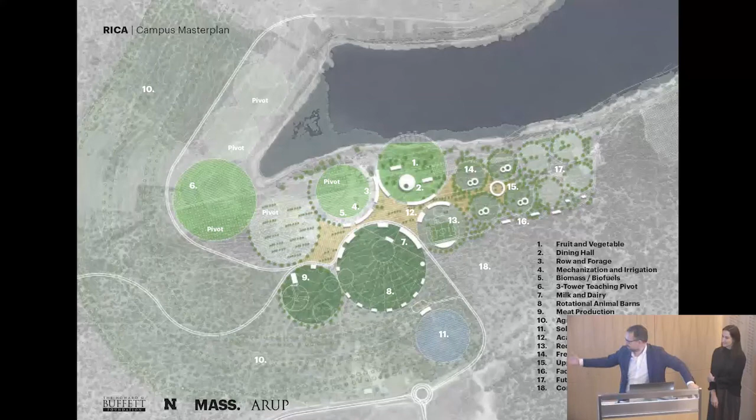This is the status of the plan right now. We're going to start construction in about a month. This afternoon we had a call to sign off on a $6 million solar facility. It'll be completely off-grid, which is very exciting.

The bigger question is, to the funder of this project: you're going to spend $120 million, what are you going to get for it? I'd say the big thing would be the indirect impact of this investment, and really thinking about how this is driving our approach to this project. It's not just about the students, but about the maximum outlay of what they're going to learn and go out into the community.

Part of the beginning of this project, the first thing was the gatehouse on the property. We engineered this in-house, it was our first. I'm Canadian, so I always want to do stuff out of wood, I think naturally. So we finally got our first wood construction in Rwanda, which was exciting.

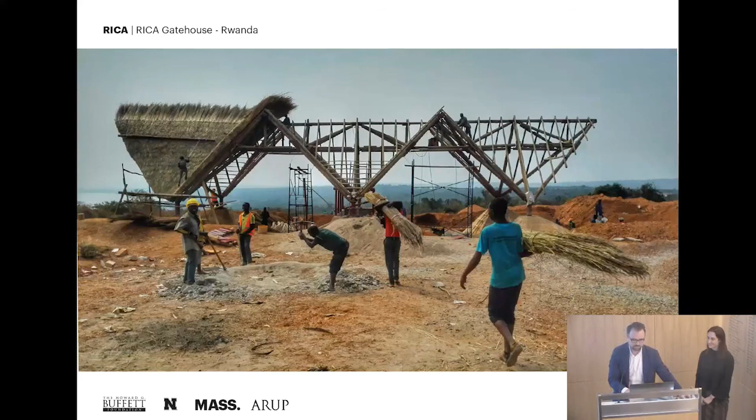There's a company that's just set up shop in Rwanda too. There's a lot of trees there and they're not felled in the best way, I'd say. So a few weeks ago we went up to see their facility, which will be the first FSC certified mill in the country. We're hoping to buy a few tons of wood off them for the roofing of this project, getting away from steel to make this the most carbon neutral, if not positive, project possible.

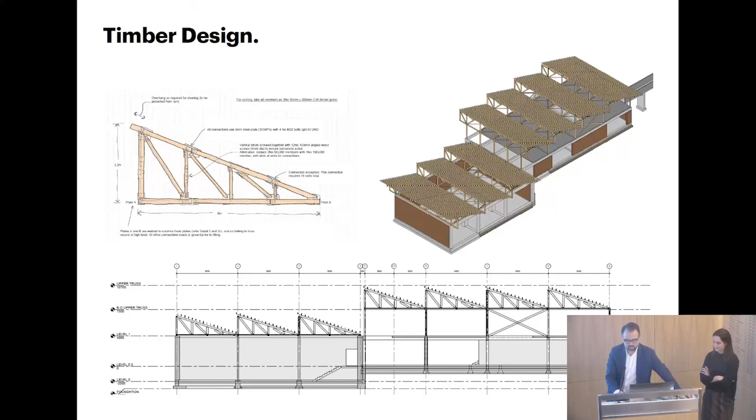Looking at the design of this: this is from one of the Arup secondees we've got down there now, beginning to look at simple ways of making these trusses to do fairly large spans for agricultural buildings, and how these can then also work with the housing.

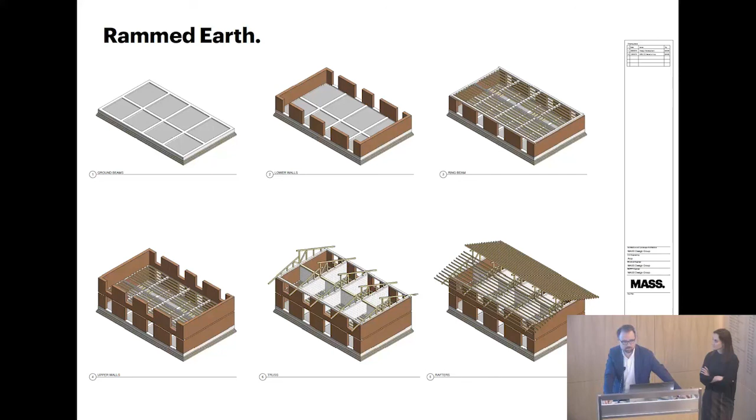You're beginning to see work with rammed earth, which is a new material for us as well, understanding all the parameters around rammed earth and how we can go multiple stories with it. This is what our engineering team is working on right now.

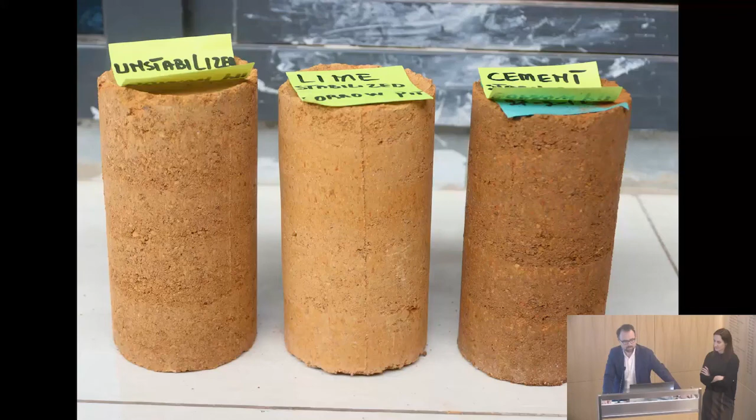Part of it was also just going out there sampling. We're hoping to use the soil from the site, literally outside the campus, to build it. So part of going down there was doing the tests necessary, getting a good sense of what's possible with it, and really getting our hands dirty, so to speak.

It was really great for the team to experience and feel what good design is, and to be in the presence of a large engineering company. We did a lot of workshops, met a lot of experts, and it was a really fantastic experience for the team. Thank you.